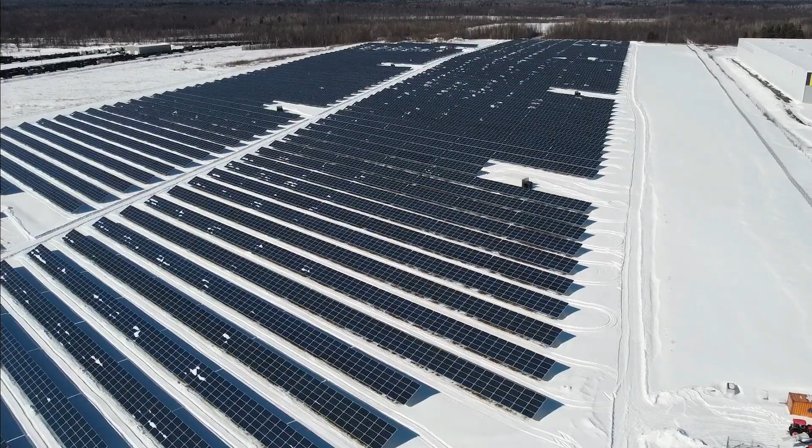In recent years, renewable energy sources have shown increasing momentum due to increasing energy consumption and to meet environment-friendly power generation. But renewable energy sources like solar alone or wind alone are not enough to meet the load demand. That's why in our research we are taking a solar-wind combined hybrid microgrid to meet the load demand.

But electricity generation from the solar and the wind systems is highly dependent on the weather conditions. If you take the solar system, it depends on the irradiation and the temperature. Coming to the wind system, it depends on the wind speed. So their intermittent nature leads to fluctuations in their output.

If you look at the solar output, from morning to afternoon it is gradually increasing because the temperature will increase. Between afternoon and evening, it gradually decreases. And at night time, it does not get any power. So it is not at all constant. Even if you take the same output on cloudy days, it is fluctuating. If you have the temperature, you will get more, and if you have a cloudy situation, it will decrease again. So it is fluctuating throughout the day.

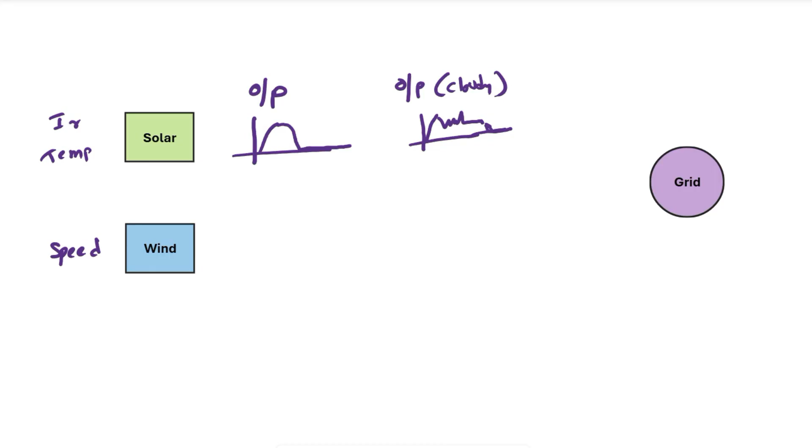Therefore, rapid compensation for the energy transmission and distribution system is important. To meet this, one of the FACTS devices, the STATCOM, static compensator, can be adopted for reactive power compensation and for decreasing the voltage fluctuations caused by the system and renewable energy sources. So here we are taking the STATCOM to supply constant power to the grid.

Actually, the STATCOM is one of the shunt compensation FACTS devices. It is connected in parallel to the transmission system. If you see the STATCOM model, it just contains one DC source along with one inverter block, and you can connect it to the transmission line using transformers. Here you can take any DC source like a battery or ultracapacitor. But our transmission line is AC, right? To convert this DC into AC, we are taking this DC to AC converter. This is the line diagram for the STATCOM.

Whenever solar and wind are not available, the STATCOM will inject voltage into the transmission line. Even if you have fluctuations, like in daytime if it gets cloudy or the wind speed is not enough, the STATCOM will compensate for these two sources. That's why in our topic we are taking a solar-wind hybrid system with optimized STATCOM. Now you can get clarity about our title, that is, solar-wind hybrid microgrid with optimized STATCOM.

If you look into the block diagram, here we are taking two sources, one is solar and the other one is wind. At the solar output, you will get only pulsating DC, not pure DC. To get pure constant DC, we take one boost converter here. So after the solar output, we take one boost converter along with a maximum power point tracking technique, and here we are taking the perturb and observe maximum power point tracking technique

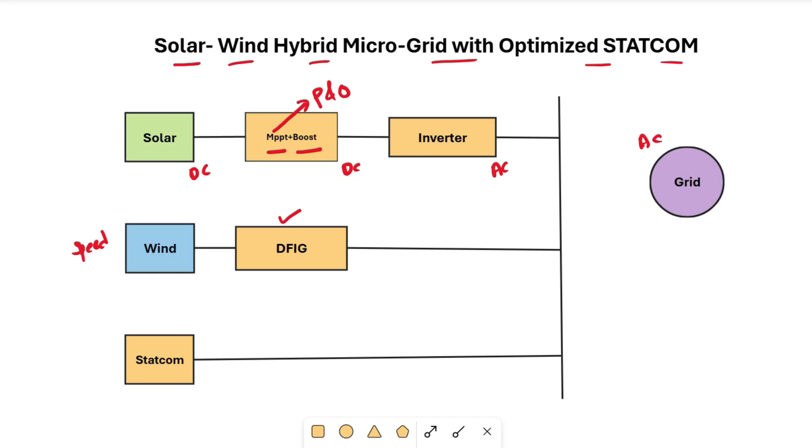This is the overall block diagram for our project title, solar-wind hybrid microgrid with optimized STATCOM. Here you can see in every source we are using power electronic devices like the inverter and boost converter. Even in the DFIG we are using back-to-back converters. Likewise in the STATCOM, as I told you, we are using one inverter. That inverter plays a key role when we need to inject voltage and compensate reactive power. In that inverter we are using bidirectional switches like IGBT or MOSFET.

To give the switching pulses to control our overall circuit, we are using PI controllers, proportional and integral controllers. Those PI controllers need proportional and integral gain values. Traditionally, to get these gain values, we use trial and error methods.

Okay, but in our topic, to get the exact values, the precise values, we are using a genetic algorithm to get the gain values in PI controllers. Here we are using the PI controller only, but to get the gain values, we are using the genetic algorithm method. Then you can get the exact, precise value of Kp and Ki. Then our system will perform with better response and voltage stability in terms of non-linear nature. That is the one main advantage of this project. Here we are using the genetic algorithm to get the gain values of PI controllers. Okay, that is our main topic.

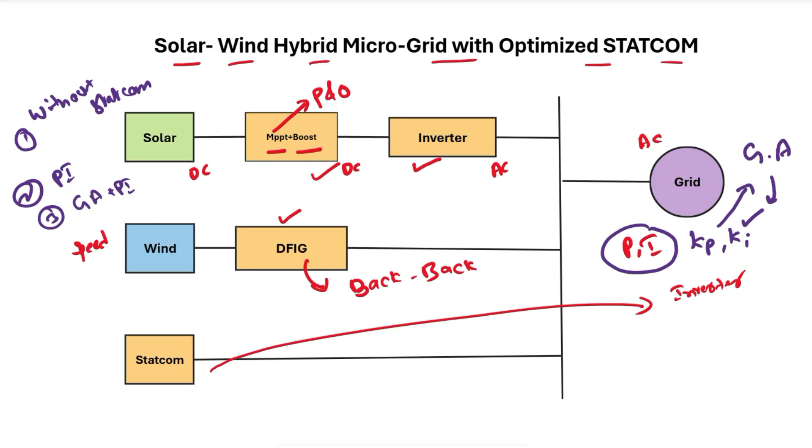Now we can go with the MATLAB simulation. In MATLAB simulation, I will show you three different things. One is without STATCOM. The second one is with only a PI controller, without genetic algorithm. In the third simulation I will show you the genetic algorithm PI controller. Now you can compare all three waveforms and summarize which is better. Okay, now open your MATLAB.

Yeah, this is the MATLAB circuit without STATCOM. Here you can see this is the solar part. Here we are taking the temperature and the radiation, and we are connecting to the boost converter. This inductor, this switch and this diode, these three make a boost converter, and here you can connect to the inverter.

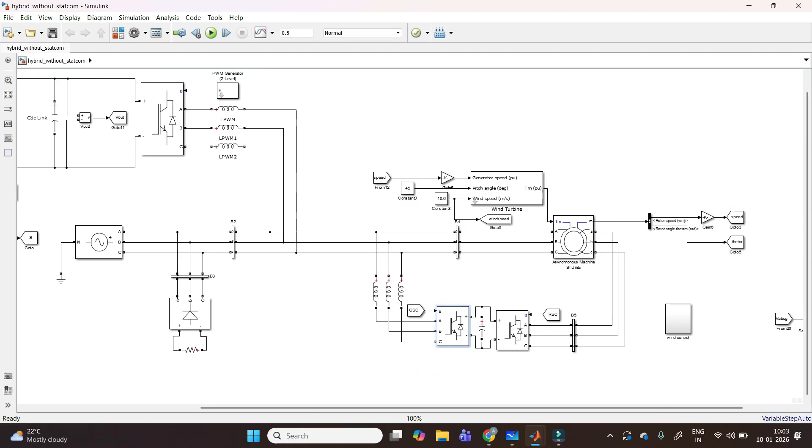This is the solar part, and here you can see this is the wind part. Here we are using the wind system, and also the double fed induction generator. This is the back to back converter. I told you earlier, right? We are using the DFIG. So here this back to back converter will help you get constant output from the wind system. Then after that we give it to our grid.

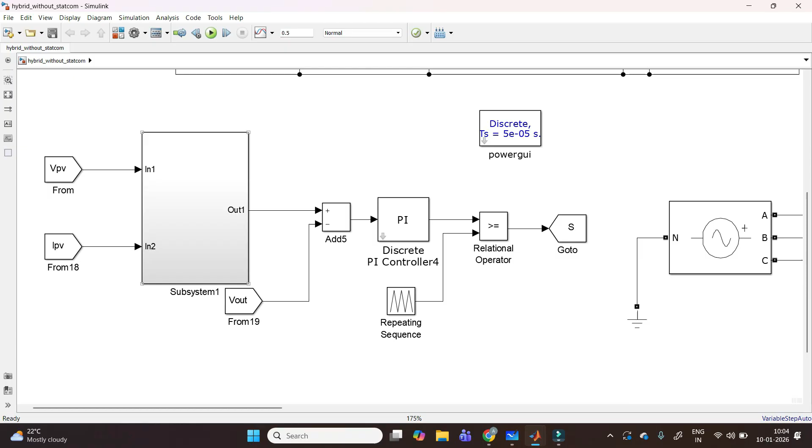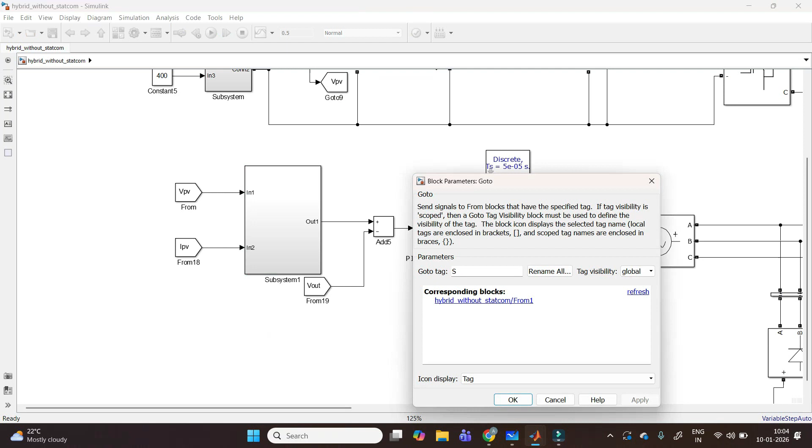And here we are taking one load, and coming to this one, this is the MPPT technique. I told you we are using the perturb and observe technique. So here we are using the voltage and currents of our solar system, and we implement the perturb and observe algorithm here, and we give it to our boost converter switch. Okay, that is this one. Here you can see we did not use any STATCOM. Let's see how it will perform.

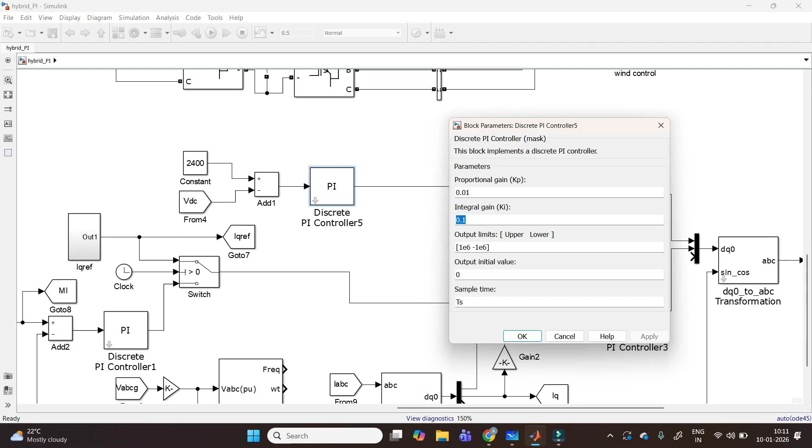Here we are using the PI controller, and the PI controller gains are taken by a trial and error method. You can see here we are taking only 0.01 as Kp and 0.1 as integral gain. This is just taken randomly, and now you can see how the output will perform. Just run the simulation and open the voltage profile.

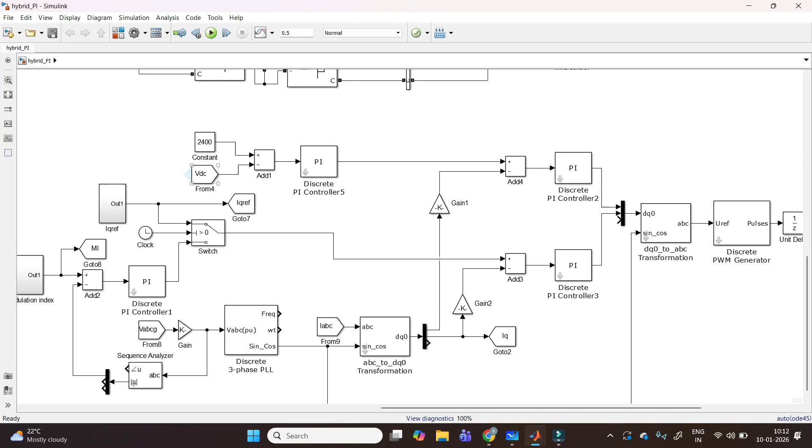Now you can observe the same circuit but with gains obtained from the genetic algorithm. Okay, here is the third simulation. Same simulation, but in this STATCOM control scheme we are using the PI gains obtained from the genetic algorithm. So here we are using the exact precise values. Now just run the simulation and see how the output profile will be.

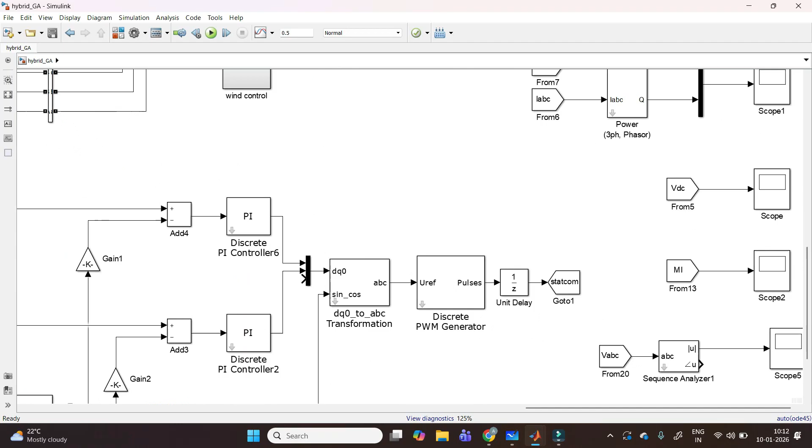Okay, I think we can summarize here: when compared to without STATCOM and with only PI without genetic algorithm, by using genetic algorithm gains we can obtain an excellent output voltage profile. That is the conclusion of our project.